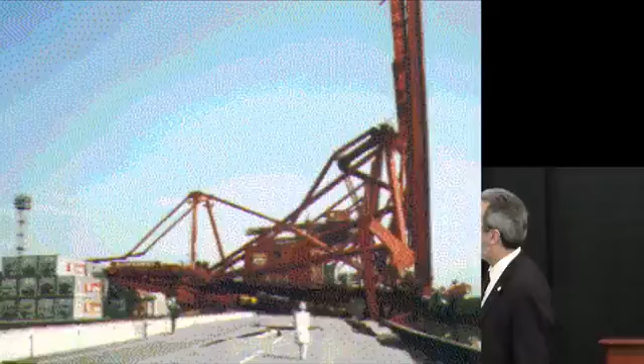Portions of the transportation infrastructure were devastated. The Akashi Kaikyo Bridge, still the longest bridge in the world, was under construction at the time, and the two tall pylons you see there moved relative to one another by about a meter. The bridge had to be redesigned in order to finish the construction. And perhaps most importantly, the port facility was destroyed, all in the span of about 30 seconds.

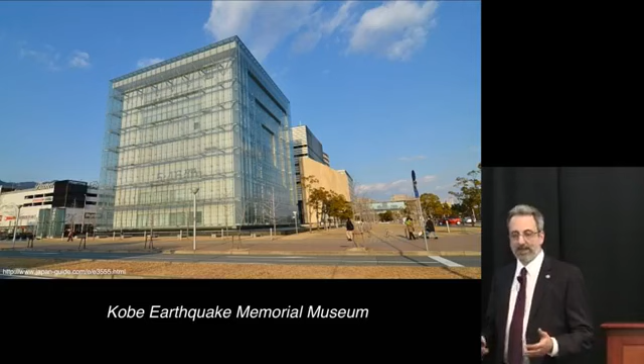If you go to Kobe now, and I encourage you to do so, you can go to the Kobe Earthquake Memorial Museum, a really unique place, and they have docents, volunteers, and in their broken English and my broken Japanese, we had a lengthy discussion about what it was like to be in the city in the days and the months, and in fact the years following the earthquake, as they tried to figure out how to rebuild, how to recover. And the city is still trying to recover.

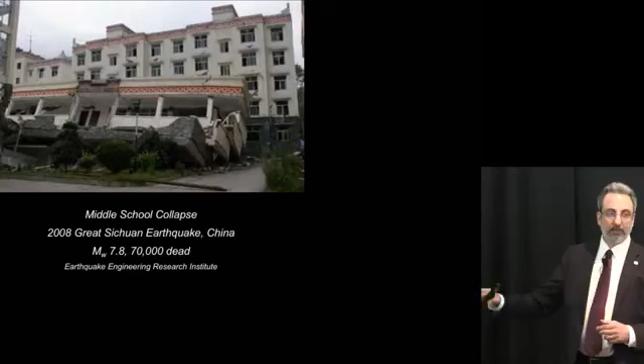And we see this repeated over and over again around the world. 2008, Great Sichuan earthquake in China, 70,000 people dead. 2005, Great Kashmir earthquake in Pakistan, leveled entire villages. 1976 in China, 255,000 people dead from one event.

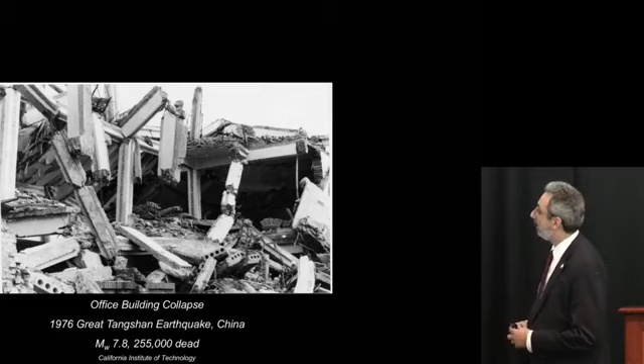And in Japan, the most seismically prepared country in the world, in my opinion, a large earthquake, magnitude 9.0 in 2011, and the subsequent tsunami that I'm sure many of you remember took out the Fukushima nuclear power plant, and that whole region still hasn't really recovered from this event.

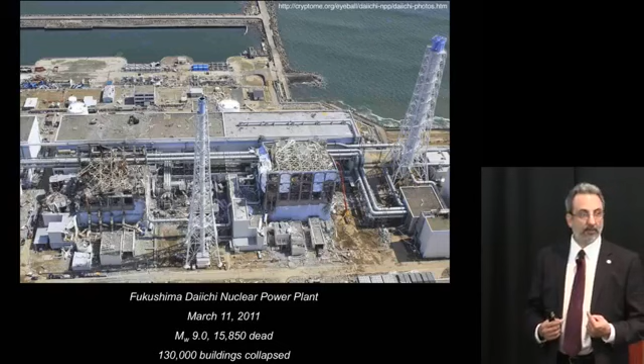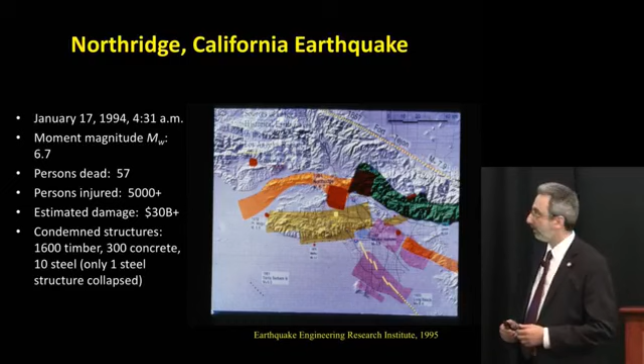But these aren't just events happening around the world, they're happening in this country too. Some of you might not remember the 1994 Northridge, California earthquake, but it really played a very significant role in how we think about structural engineering in this country. It was a magnitude 6.7 earthquake on the high side of a moderate earthquake, certainly not the big one. Thankfully, not too many people died, not too many structures collapsed, but it was the costliest natural disaster in the country's history.

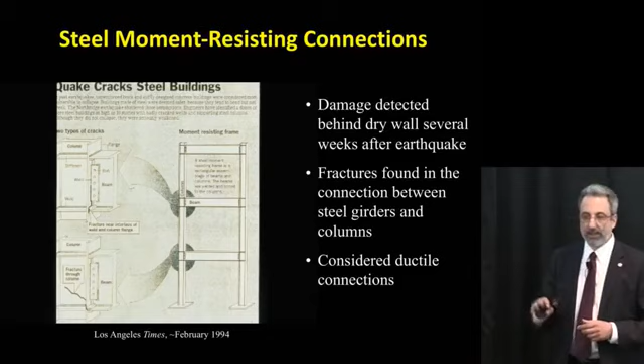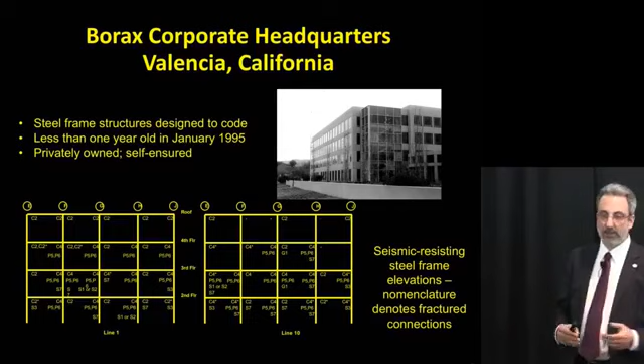The Borax corporate headquarters was less than a year old at the time of the earthquake. It was brand new, designed to code by a perfectly fine engineer. This was a moderate earthquake, and the owner, needless to say, was confused. This is a private company and it was self-insured, so this was a huge loss.

The building officials, after the Northridge earthquake, essentially shut down steel construction for a couple of years while researchers around the country and practitioners tried to figure out what happened. And that will bring certain portions of an economy to a standstill.

In the structural engineering world, we use a term called disproportionate collapse. We started using it in 1968 after a gas main exploded in the basement of this apartment building in the United Kingdom that caused the partial collapse you see here. Disproportionate means that the amount of damage that occurred seems disproportionate to the magnitude of the load, much more than we would normally want or expect given the loading.

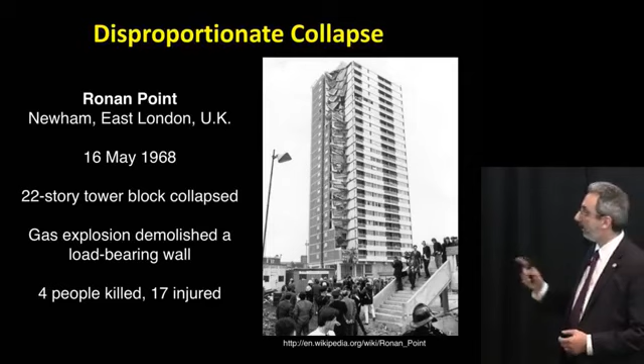But the concept of disproportionate collapse isn't just for an isolated building. It can also be thought about in the context of a region, and perhaps there's no better example of that than Hurricane Katrina in 2005, which became the costliest natural disaster in the country's history after Northridge. Because of the levee break, neighborhoods were essentially destroyed, and those neighborhoods really still, in many ways, haven't come back.

Kobe, Japan was the 6th largest port in the world at the time of the earthquake. In a relatively short period of time, economically, it went off the face of the earth. It still hasn't recovered. The shipping traffic had to go elsewhere and form new relationships elsewhere. It didn't take long for them to do that, and the city has been struggling to come back, at a time when shipping traffic is rising and has been rising exponentially around the world.

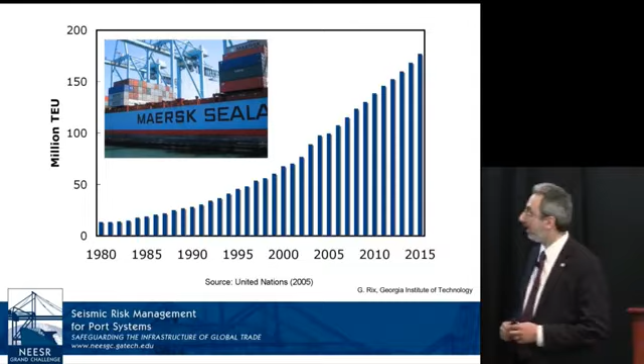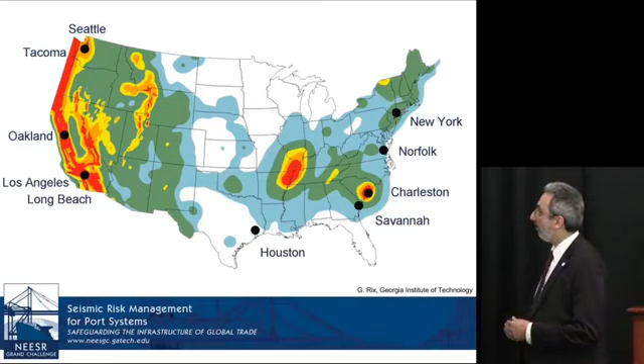So what are the vulnerabilities in the U.S.? Well, we're certainly familiar with the high seismic zones shown in red here on this map from the USGS. California, we understand, has very high seismic zones in many parts of the state. We're learning more and more about the Pacific Northwest, and more about mid-America around Memphis, Tennessee, St. Louis, Missouri, where very large earthquakes have happened in the past. Charleston, South Carolina, and even moderate earthquakes in this region are vulnerabilities. We have been improving, but we still have a ways to go.

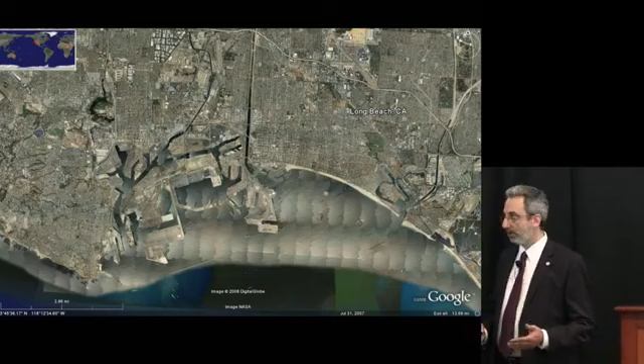This is the port of Long Beach, California, certainly in a high seismic zone. If we get an earthquake there, it could easily be larger than what we had in Kobe. What is that going to mean for the economy of the United States and of that region, where a huge amount of shipping traffic, goods from Asia, go in and out every day?

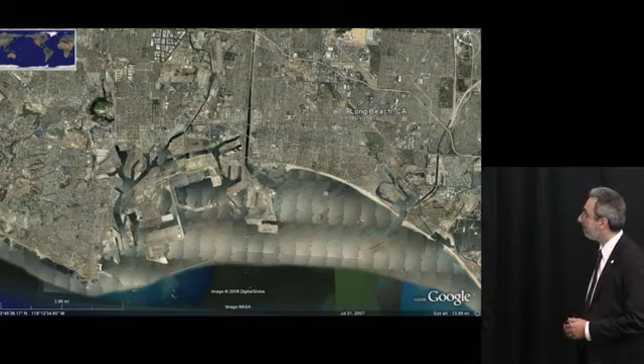So what does it mean to be resilient, to bounce back quickly from extreme events? How do we start to bake resilience into the design of our structures in our urban regions?

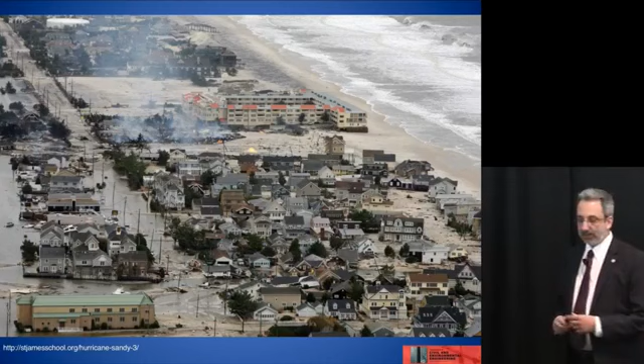Superstorm Sandy was certainly a relevant event for this part of the country, and the hurricanes that can affect the East Coast are clear to us all. I'm actually impressed by how much of the region around New York City has recovered from Hurricane Sandy, Superstorm Sandy. But how many times do we need to see images like this in New York City or in Boston before we recognize that we've got issues that need to be addressed?

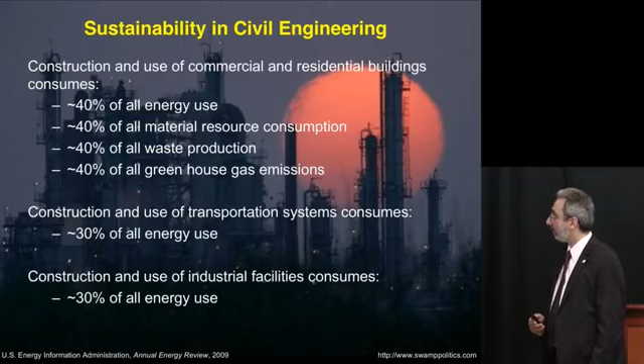But the way we absorb energy from the earthquake or the hurricane is through damage in the vertical columns, the horizontal girders, the diagonal braces. The steel material will yield, stretch, have permanent damage. Concrete will crack, have permanent damage. We ideally design it not to collapse, but we don't design it not to be damaged.

So you can have a relatively new building, and if you have a significant event, it might be so damaged that it takes weeks, months, maybe even years to repair. Or perhaps even it has to be condemned. This is our current state of the art. I think we could do better. And what I'd like to do today is show you a few ideas that we've been working on for the last few years to see how we can do this.

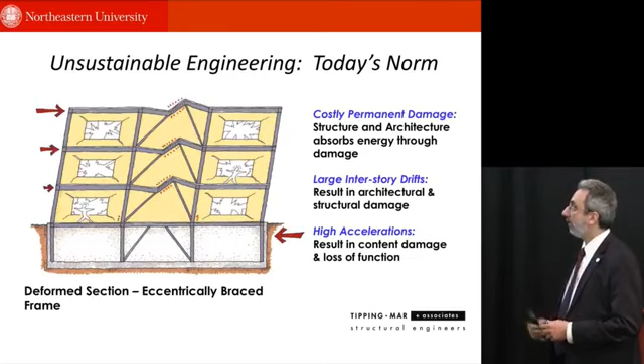The first is a project that I worked on with Greg Deierlein, the late Helmut Krawinkler, and Sarah Billington at Stanford University. Some of you have seen this idea. I've been talking about it for a few years now. But as you'll see, it's still quite relevant as we move forward. We call this a controlled rocking system, and the system for building structures has three features.

First, we take standard steel brace frames like we see here, the frames that would normally be damaged in an event to absorb the energy from that event, and we allow those frames to rock free of the foundation. And then we use that motion to engage what we call replaceable energy dissipating fuses, like the old fuses in the electrical system in your basement.

The fuses are shown in gold there, and they're just standard steel plates with diamond-shaped cutouts in them. We call them butterfly fuses. And the diamond-shaped cutouts allow those steel plates to shear about 40% of their original dimension without failing. They will yield the metal, but they're not going to fail.

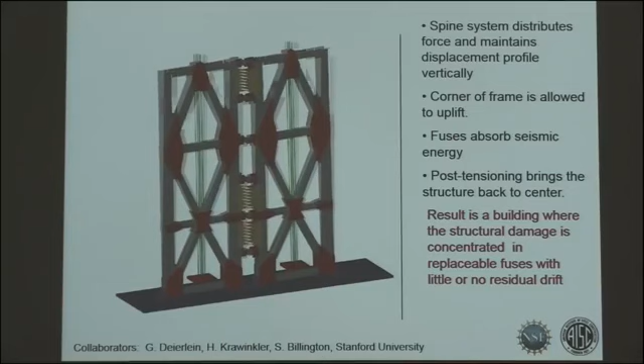Then the third component are the green lines. That represents vertical post-tensioning that we use to snap the building back to vertical. Then you could pop out the old fuse, put in the new one, and you're ready to go again. That's one idea for resilient engineering, how to bounce back quickly after extreme events.

We did a lot of different kinds of experiments on this structural system, culminating with Greg and I going over to E-Defense facility, the largest shake table in the known universe, which is outside Kobe, Japan. This shake table facility was built by the Japanese in response to the Kobe earthquake. It's one of the things they did to try to build a state-of-the-art facility. You can construct full-scale 7-story buildings on the shake table and then shake it with a 3-dimensional earthquake for very large earthquakes. We did a 3-story building here at 2/3 scale.

You could see the specimen in gold here. It's a single frame in this case, where the fuse is down at the bottom center. And then the gray structures around it, those are inertial masses on each of 3 levels. And they're on linear sliders. So as we shake this shake table to represent an earthquake, those inertial masses will shake back and forth, and they're attached to the specimen, and all that inertial force is thrown into the specimen, which is the only thing that's resisting the earthquake.

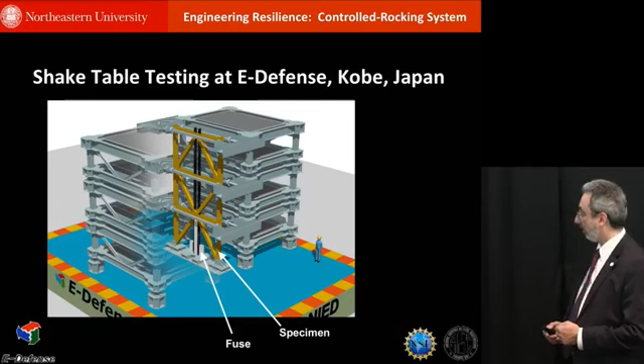So 2/3 scale, this is about 30 feet tall. Each of the floors about 10 feet tall. On the right shows a zoom in on the specimen, and as that gold frame rocks back and forth in a trough, that white post will go up and down and engage the fuse, which is at the bottom center, surrounded by post-tensioning to snap this back to vertical. You can see a zoom in on the fuse on the left with those diamond-shaped cutouts.

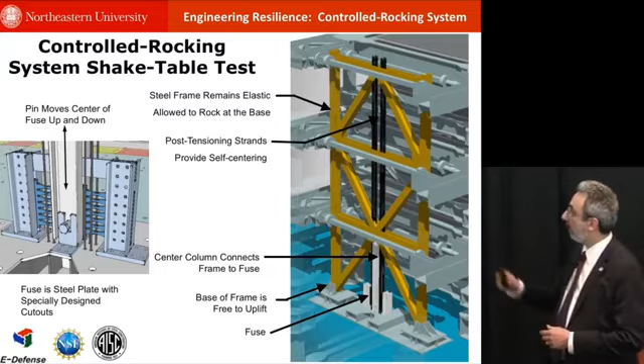This shows a photograph of the specimen being dropped into place. We did a number of specimens and experiments over there. The Japanese were extremely helpful and put in a lot of funding on their own because they were so interested in these concepts. You can see on the right, we're ready to go here on that large shake table, and there's a person there to give you a sense for the scale.

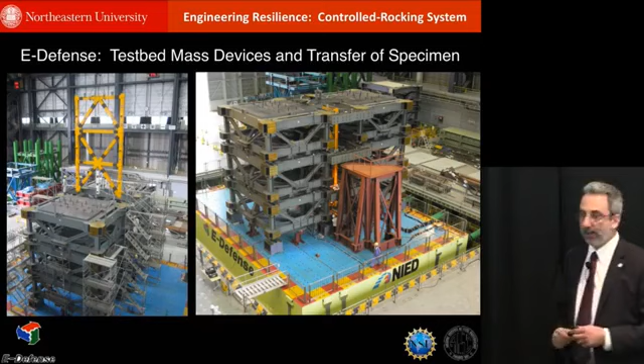Now, it's going to take some years to get this into the National Building Code because it's really a fairly different way of designing structures. Our building codes are not set up to do something with a stiff frame, and by the way, the whole point here is that those steel frames remain damage-free with a fuse.

But we're working on getting this into the building codes, and in the meantime there have been some early adopters, such as David Mar out on the West Coast, putting these systems into high seismic zones, convincing the building officials and the owners that this is the way to go. He did so in the Orinda City, California offices with a 2-story steel brace frame there for the seismic system.

You can see the post-tensioning looping underneath, so you get enough length on the post-tensioning to be able to stretch and snap this back to vertical. And he used a little different configuration.

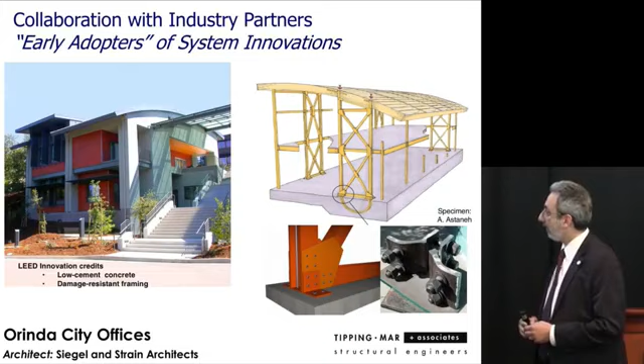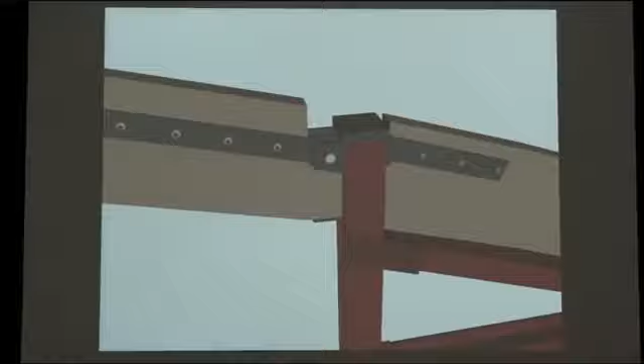Here he used deformable angles down at the base that deform when the structure rocks. You can see the post-tensioning then running up the inside of the column, and then you can use things like slotted connections or a pin connection like you see at the top in order to ensure that the rocking motion does not inappropriately disrupt the rest of the frame. Then if you need to, you can replace the angles after the major event.

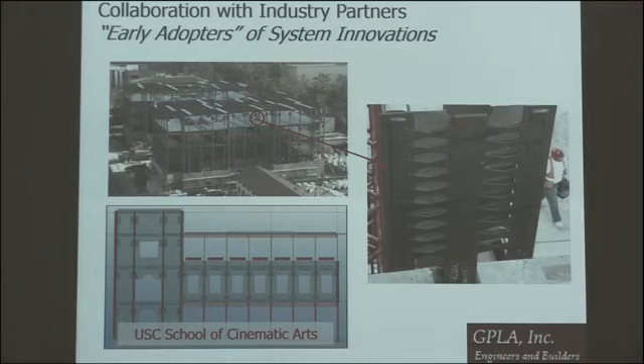In Southern California, Greg Luth used this system in the University of Southern California School of Cinematic Arts. Instead of steel brace frames here, he used precast concrete wall panels that are going to rock, and he connected them with the steel butterfly fuses like you see here.

David Mar used this in the David and Lucille Packard Foundation headquarters in Los Altos, California, configuration very similar to what we tested at E-Defense.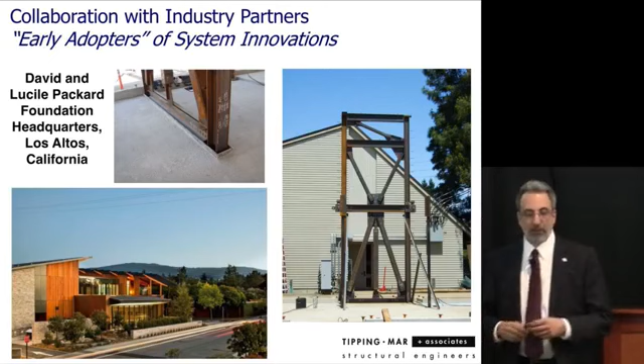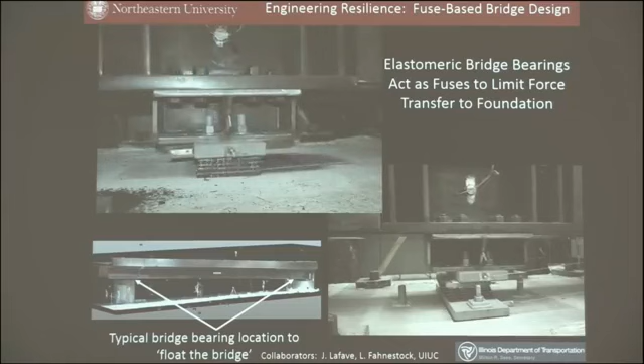And in the years intervening, I've been trying to take this idea to other types of structural systems, tower systems, bridge systems. This shows some experiments I did with Jim LaFave and Larry Fahnestock at University of Illinois, looking at standard elastomeric bearings that sit on the underside of girders and on top of the foundations in a typical bridge structure.

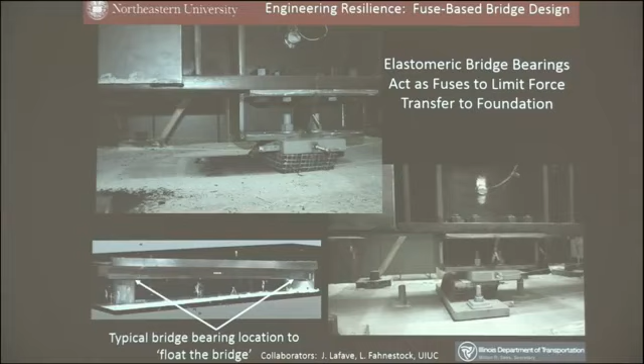These are there for just minimal temperature distortions that occur in a bridge to be able to absorb those. But what we showed here is you could do large displacements like you would see at an earthquake and essentially use these bearings as a fuse, because they isolate the superstructure and leave that superstructure relatively damage-free, and leave the foundation structure damage-free. So we'd like to try to take these ideas to other places.

There's a new project that a few of us recently got from the National Science Foundation and from a number of steel organizations, a large grant from the steel industry. This is work with Ben Schafer at Johns Hopkins, Matt Eatherton and Sam Easterling at Virginia Tech. And the project here is to look at the three-dimensional behavior of buildings, shaking in earthquakes, as shown in the animation on the right.

In particular, we look at the floor system, which is responsible for taking all the inertial force in the building and throwing it out to the seismic system, the vertical steel frames, for example, that bring the forces down to the ground. We know surprisingly little about the behavior of those floor systems, given that we're designing them every day. We have surprisingly few design provisions to guide us in the design.

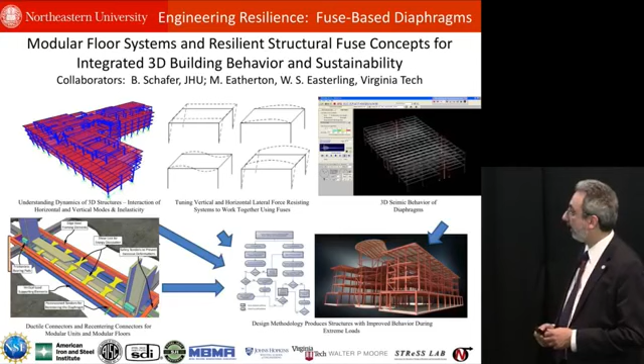So we got this project to understand that better, especially for three-dimensional buildings like you see on the left. As part of this, I'd like to look at the concept of putting in replaceable energy-dissipating fuses between the floor diaphragms and the steel vertical systems. That will essentially cushion the seismic system and perhaps transform the way in which we design buildings in high seismic zones.

This will be work we're doing in the coming years out at the stress lab. This shows a schematic view of some of the test specimens that we're going to be testing at full scale to look at a floor diaphragm subjected to cyclic seismic loads. You can see in yellow some of the fuses that we'll try to incorporate here.

Now, when we're developing new structural systems like this, we also want to think about how to prevent collapse. Of course, in our field we do a lot of experimental and computational simulation, but historically, engineers have not actually been simulating structures collapsing all the way to the ground because it's difficult. So in the last few years, I've been developing some methods with my students to do just that, including new approaches for simulating fracture in steel so you can actually have complete dismemberment of steel components and therefore propagate collapse to the ground.

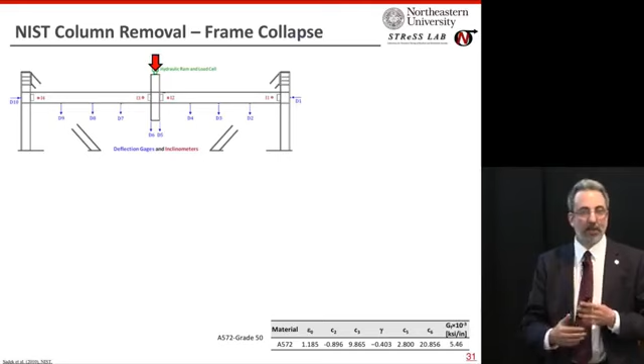This is a test from the National Institute of Standards and Technology where they had two girders framing into a column, and then they're mimicking what would happen if that column below was blown out, for example in an explosion, and then the weight from the building above pressing down on that column. They wanted to see how the structure would behave and if the connections would hold up.

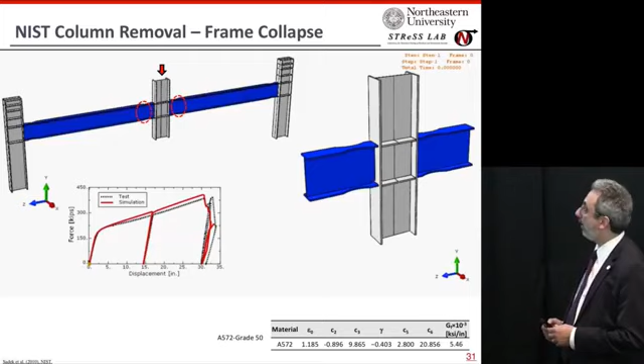So we compared to the test. You could see in the plot there of the vertical load versus vertical displacement, a very nice comparison. Here's an animation that shows the stress buildup in the connection regions and, in fact, the fractures starting to form here.

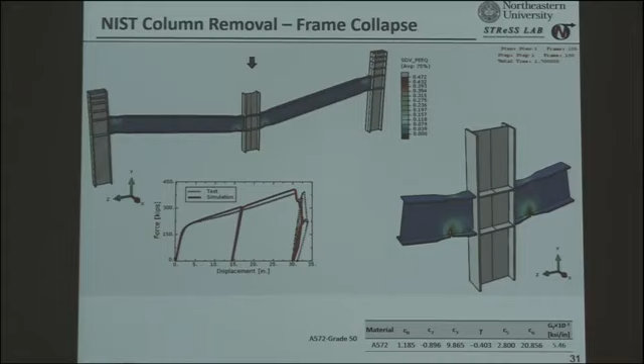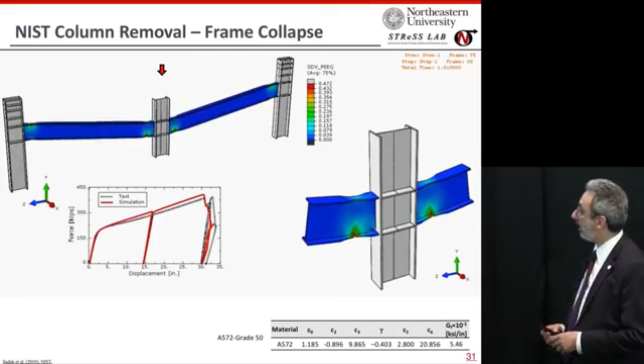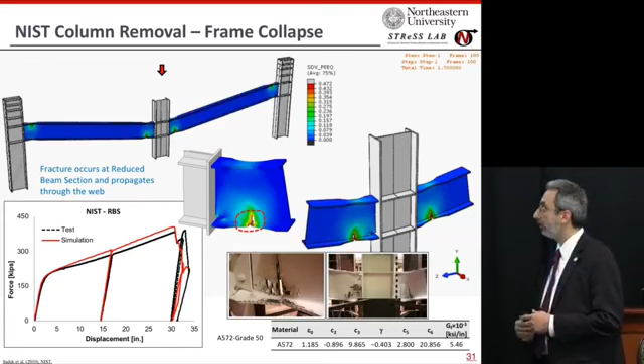We've developed new approaches to be able to create and simulate the initiation and propagation of those cracks. It's quite difficult to do, and we have validated now against a wide range of other experiments. You can see here we're matching up with the photographs of the experimental tests quite well. So we think this is quite robust and is going to start to let us model collapse of structures completely to the ground, and therefore, of course, try to develop methods to prevent that from happening, and indeed help make that urban region more resilient.

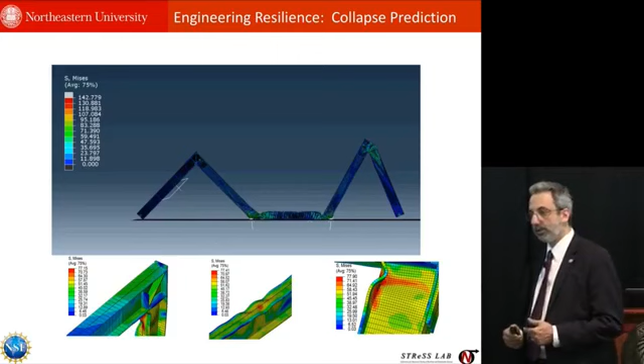Simultaneously, we're thinking about sustainability, how to cut down on energy use in construction, for example. One system we've been working on for a number of years relates to steel structures. The end-of-life scenarios of typical construction materials are shown here.

On the left, we can see what happens to concrete after buildings, for example, are taken apart. About 20% of the concrete is recycled, 75% of it is downcycled, meaning it's essentially pulverized and then used in applications that don't require as much stress, such as sidewalks. Timber, which many of us think of as a very sustainable material, about 60% of it goes to the landfill after its use. I hope the younger generation can develop systems that improve on that. Steel, on the right, we see about 93% of all construction steel is recycled, and indeed about 100% of all the steel you see in building structures comes from recycled steel.

So that's good. But recycling also requires energy to melt the steel back down. About 6% of all steel is reused, and I'd like to see that percentage go up dramatically.

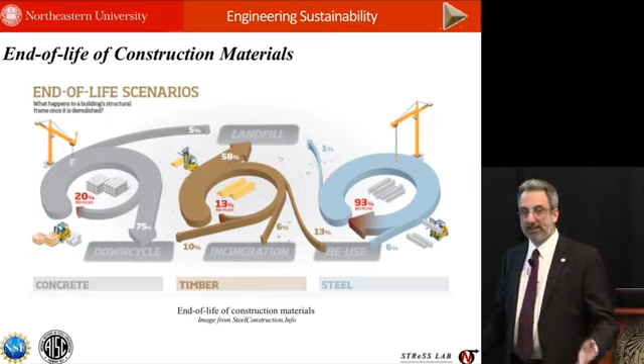So for the last several years, we've been working on a project we call Design for Deconstruction. This is done in collaboration with Mark Webster at Simpson, Gumpertz, and Heger, a practitioner. Steel building structures right now are constructed by having steel framing for your floor system and then a monolithic concrete slab poured on top, connected to those steel girders with what we call shear connectors that are embedded in the concrete and welded to the steel. It's not deconstructible at all. So at the end of a building's useful life, the building has to be demolished, and the floor system has to be demolished.

We envisioned something different, and here we're using precast concrete planks in a staggered pattern like you see in the floor plan on the right. Those planks are going to be attached to the steel beams underneath with clamps.

These clamps are relatively new on the market. They're very strong, and so we use the clamps to attach to embedded channels on the underside of those planks. This is a system that Mark conceived of early on about a decade ago, and we were pleased to get some NSF funding to be able to look at this.

And we view this to be used in the context of all bolted steel construction. So at the end of a useful life of a building, you can dismantle it, deconstruct it, and reuse the planks. You could stock them in a supply center, just as we do now with new steel beams, and then deconstruct the steel beams and columns and reuse them. Most buildings are taken down because the owner doesn't want them anymore, not because they've been subjected to some extreme event. Of course, if the structure is subjected to extreme loads, you probably can't reuse the components, but the vast majority are not. We'd like to create a whole new industry around this.

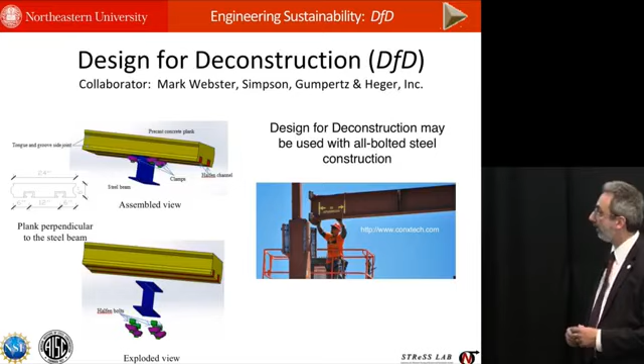So we did some tests out at the STReSS Lab to validate the structural integrity of these systems. On the left are what we call push-out tests, which look at the strength of the clamps under cyclic seismic loading. But I want to show you results from the system on the right. This is a full-scale composite beam with a steel girder and 15 of these precast planks on top, connected with the clamps. We use those vertical actuators, the two shown in black, to push down with extreme loads, simulating the loads you'd have on a floor, just like in this room. We want to make sure the structure has integrity.

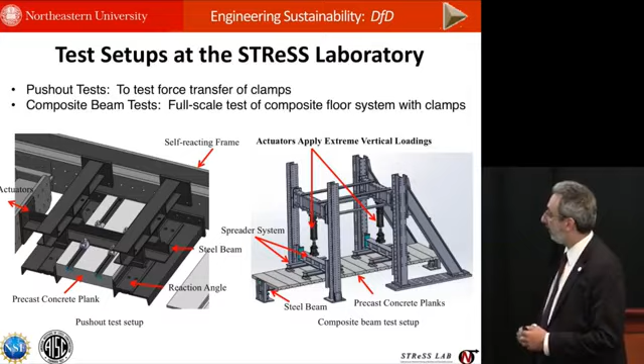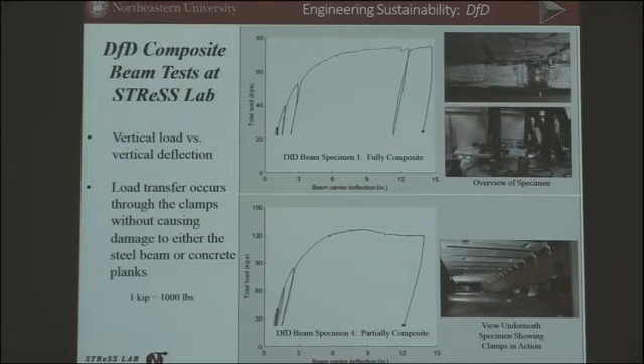So this video shows the vertical load versus vertical displacement on a couple of our tests. The middle video on the right is time-lapse—the tests take hours—and shows an overview of the specimen, so you can see it deflecting down as we press with the actuators. The other two views show the steel beam and the underside of the concrete slabs. You can see on the bottom right the clamps as we move down the length of the beam. What these results show is that we could transfer the force necessary between the concrete and the steel very effectively, and in fact, what's quite new is it's essentially damage-free. A damage-free approach to force transfer is what enables these components to be reused.

Now, simultaneously with developing new types of structural systems to try to be resilient and sustainable, we've also been working on new methods for monitoring structures and being able to quickly and effectively understand what the damage is on a structure, both for routine inspection and especially after a significant event like an earthquake or a hurricane. I've been working with colleagues at the Robotics Institute at Carnegie Mellon University for the last several years on this, using unmanned aerial vehicles to completely and autonomously circumnavigate a structure.

The UAVs, as we call them, are mounted with laser scanners and cameras that take a complete 3D point cloud and a lot of camera images of the structure, which I then use to reconstruct the three-dimensional geometry, develop analysis meshes which we use to simulate the response of the structure, and most importantly, we use those laser scans and images to automatically detect damage.

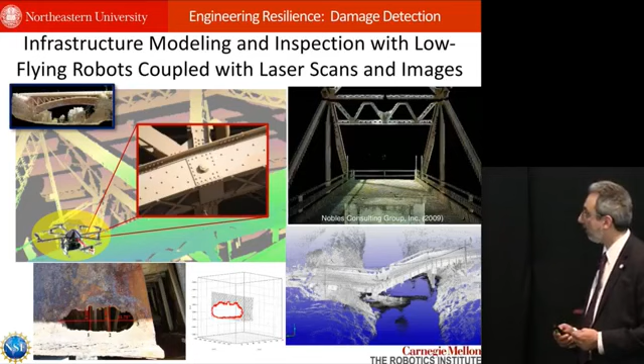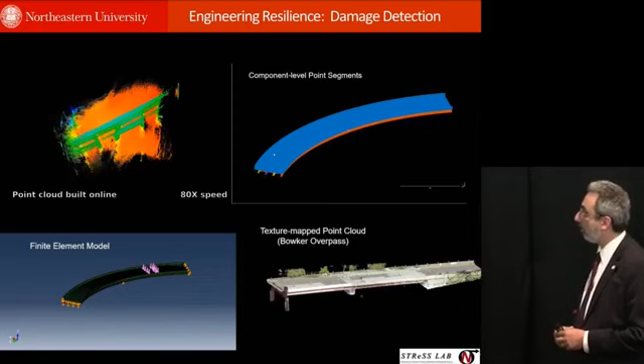So this shows a series of videos that give you an idea of what we're doing. On the left, the unmanned aerial vehicle is autonomously flying around the structure. So these are not drones—they're not piloted, they're completely autonomous. Through the laser scanner and the images, it builds up the colored point cloud you see here. The colors come from the camera images mapped onto this 3D point cloud.

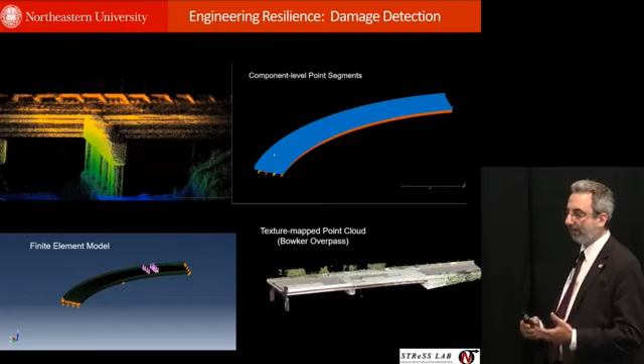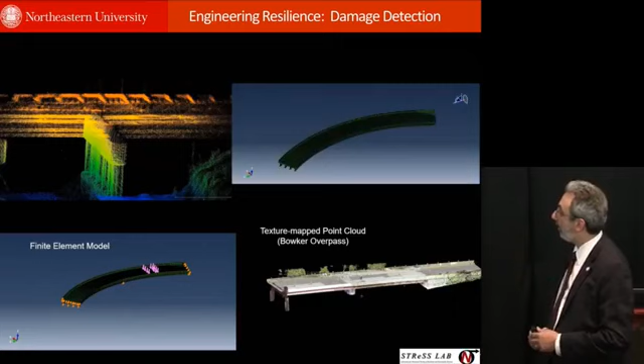Then on the upper right, we use that point cloud to automatically identify every object in the structure, and we've developed the algorithms to do this. They're heuristic-based, meaning we are essentially mimicking a structural engineer's understanding of how a structure is put together. We have developed algorithms for occlusion, so understanding that members are hidden behind members, bolts going through members, and from there we create the complete three-dimensional geometry, understanding every object, and then we mesh it.

You could see the small squares there. This breaks that geometry up into small cubes, which we can then use for what we call finite element analysis, to simulate the stress, the strain, the displacements, as we see on the lower left when we start to subject this structure to extreme loads.

You can see the deflections going on now, typical loadings on a bridge like this, so we start to understand where the damage may be coming from. Then on the lower right, we go back to the point cloud and use that to automatically detect damage: steel section loss from corrosion, bent members, out-of-plumb members, concrete cracking, concrete spalling, and other such types of damage.

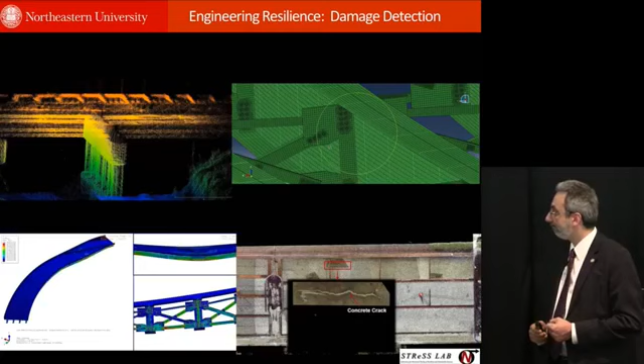Over the last several months here at Northeastern, Taskin Padir, Peter Boynton, Steve Flynn, and I obtained a grant from the Department of Homeland Security and the Global Resilience Institute right here at Northeastern to take these technologies and start looking at post-event automated damage detection, now looking at structures after a major earthquake, after a major hurricane. So we're going to be doing that moving forward. This is a little bit more difficult type of damage to detect, but our fabulous students will succeed.

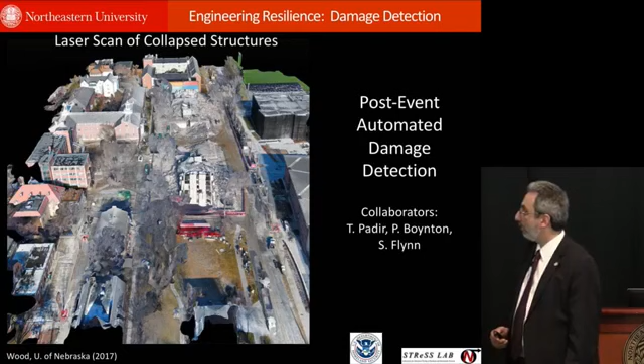Simultaneously with this work on the built environment, I'm very pleased to be participating in some major research to bring renewable energy to our country, and in particular to this region. We've been working on offshore wind for some years now with grants from the National Science Foundation, Massachusetts Clean Energy Center, and other places. This is work going on with Andy Myers here at Northeastern, Sanjay Arwade at UMass Amherst, and Eric Hines, who's at LeMessurier Associates, a practitioner also at Tufts University, and a real thought leader on this topic.

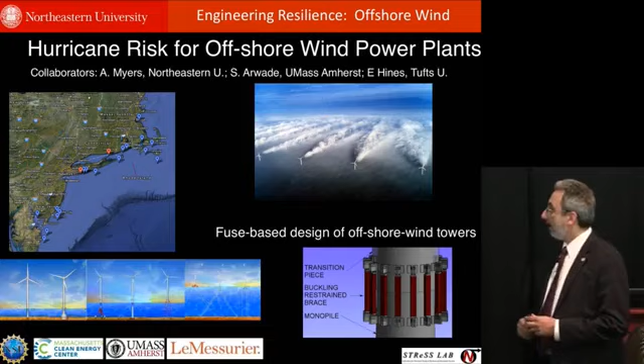As many of you might know, the country's first offshore wind farm just got installed a couple years ago off the coast of Block Island, down in Rhode Island. It's called Deepwater Wind, and it has 5 offshore wind turbines that you see here. This can provide 30 megawatts of energy. The Department of Energy has set a goal of having 86 gigawatts coming from offshore wind by 2050. 86 gigawatts is about 7% of the electricity need in the U.S. Personally, I would like to set much higher goals than 7%, but this is what we've got so far.

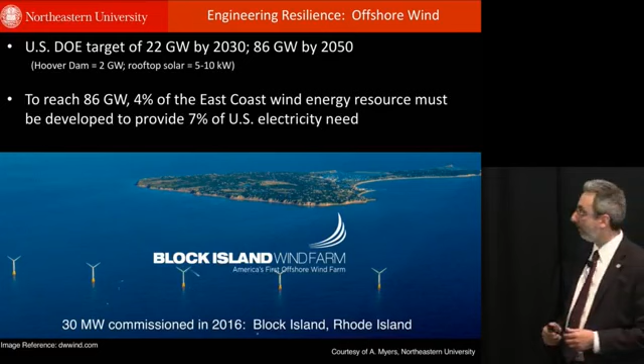Now, off the East Coast, 86 gigawatts would represent 4% of the wind capacity for offshore wind. If you do the math, what that means is there's enough wind capacity off the East Coast to power the entire country, and then some. Think about that for a second. And certainly we could power the East Coast.

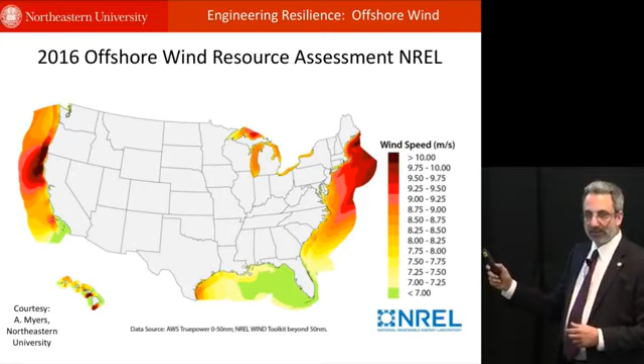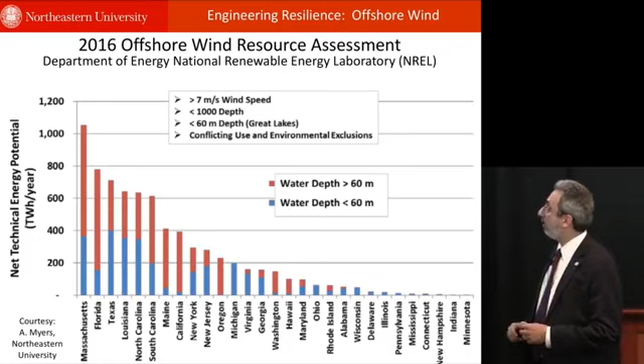Now, I'm sure a number of you have heard of Cape Wind, which got a lot of press for years. This was an offshore wind farm that they tried to develop, and it actually got pretty close, but it's not going to happen. But in the ashes of that project, an entire industry is going to be built.

Now, Massachusetts understands this. The state legislature understands it. The governors understand it. There's been some great leadership here, especially from the Massachusetts Clean Energy Center. And so there is some hope.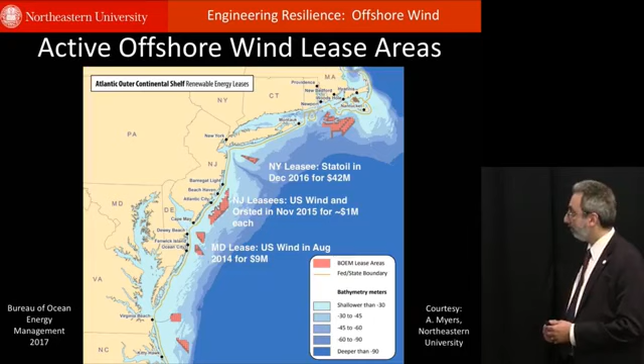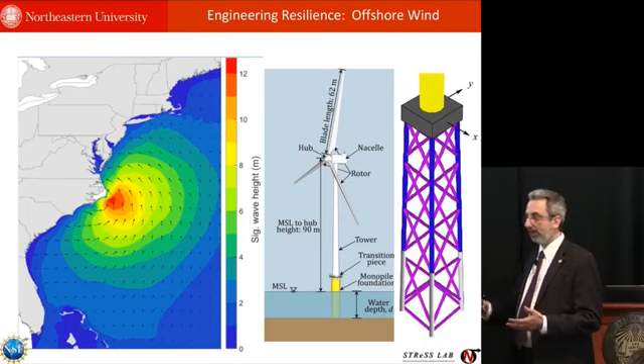Very pleased that we've gotten a good head start on this. Through the grants I mentioned before, we've been looking at the impact of hurricanes in this region, and in particular looking at the combination of wind loading and wave loading on offshore wind turbines to understand how to design them better. We've been looking at monopile towers and jacketed structures like the truss structure on the right, developing approaches for design that we think are going to be more robust, certainly in this region. We call this performance-based engineering, where we look at the desired performance at different levels of loading, for example different levels of hurricane, and then develop methods to predict that and ideally to prevent unwanted damage from happening.

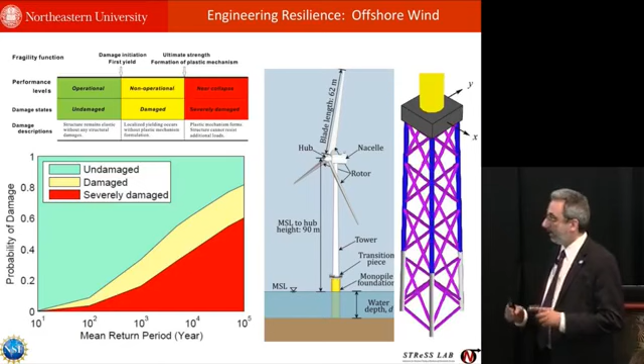In addition, the schools in this region for a number of years now have not been working in competition with each other. They've been working collaboratively. The Massachusetts Clean Energy Center gave us a grant a couple of years ago to form what we call the Massachusetts Research Partnership. It includes Northeastern, Tufts University, UMass Amherst, UMass Lowell, UMass Dartmouth, and Woods Hole. And then a few other Massachusetts institutions have started to participate as well.

Our mission with this grant is to write a report that's going to be coming out this summer that documents, ideally for an audience consisting of the federal government and the Department of Energy, what the needs are to build a national research infrastructure to create research in offshore wind so that we can create the industry and help create the industry for offshore wind.

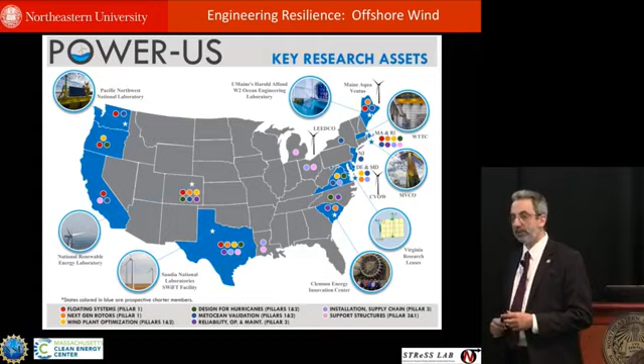As part of that, we've also started communicating with and collaborating with virtually every major player doing offshore wind in the country, and you can see that here. We formed an organization called Power US, Partnership for Offshore Wind Energy Research. Great to see these institutions, including some of the national labs, working collaboratively on this to try to make this happen.

In fact, next Monday, the Massachusetts Clean Energy Center is putting in a $20 million grant to the Department of Energy on behalf of most or all of these institutions to form the first major research consortium dedicated to research on offshore wind. So that's happening right here with Northeastern participating. Very glad to be a part of that, and we'll see what happens in the coming years.

Now let's finish off by taking this up to thinking about whole urban regions and how we think about resilience and sustainability in urban regions. The work we're going to be doing in the next couple years, which I've been working on for the last couple years on an NSF project, is with the 8 faculty that we have up there. These are all from Northeastern. Mario Sznaier is the principal investigator. They're from colleges throughout the university, so truly an interdisciplinary team, and it's been great working with them.

This is one of the NSF CRISP grants, Critical Infrastructure Resilience. Our goal is to try to make the emergency healthcare system in an urban region more resilient, and in particular we're looking at urban coastal regions that are subjected to hurricanes and storm surge.

We're going to be looking at the power network, at the communications network, at the building stock related to critical facilities like hospitals, police stations, fire stations, and so on. We're going to be looking at people before and after a major event, doing some agent-based modeling of the people and of the decision makers. And then putting all that together to do simulations where we develop control methods to try to control these networks and control these systems to make them more resilient, to be able to bounce back more quickly after extreme events.

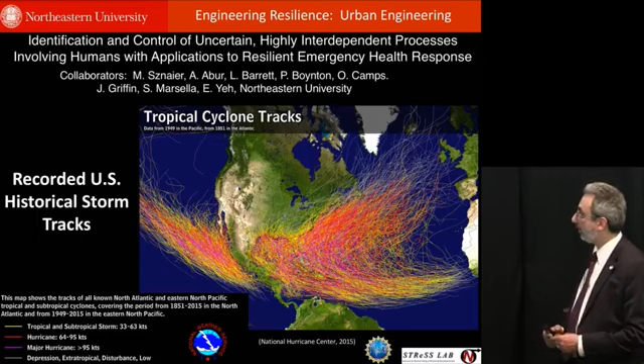We're going to be using Boston as a test bed. So in order to estimate the damage that occurs from these hurricanes, we first need to have all the assets in a region. So we're currently collecting information on every building, ideally, in the Boston region, every roadway, every bridge, every power infrastructure, communications tower, pipeline infrastructure, whatever we can get.

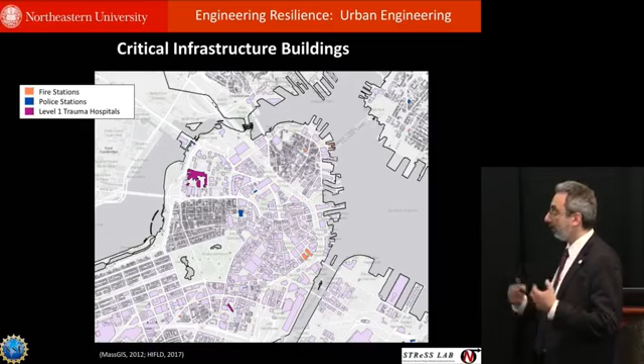So through this, we have to establish properties on these that we're going to use to drive our simulations. For example, building age, going all the way back to 1700, shows what kind of building code might have been used to design it, and then we can try to account for that in our simulations, et cetera.

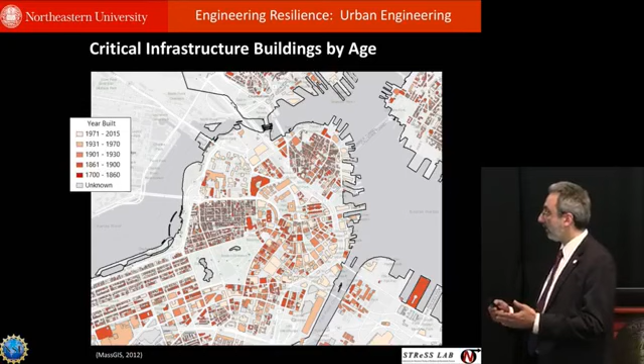What I'd really like to bring to this, though, is the concept of resilience and developing new methods that account for new types of systems that can bounce back more quickly, incorporate those in the simulations, and be able to show the advantages of using these.

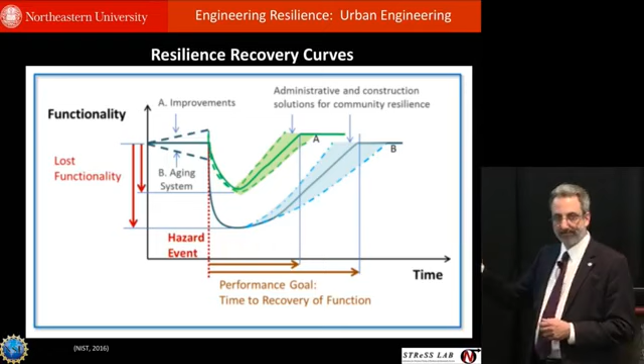And then we'll feed that information up to our network modelers in electrical and computer engineering and other parts of the project who are going to start to understand the behavior of damaged networks, of damaged healthcare systems, and how to make these systems more resilient as we move forward.

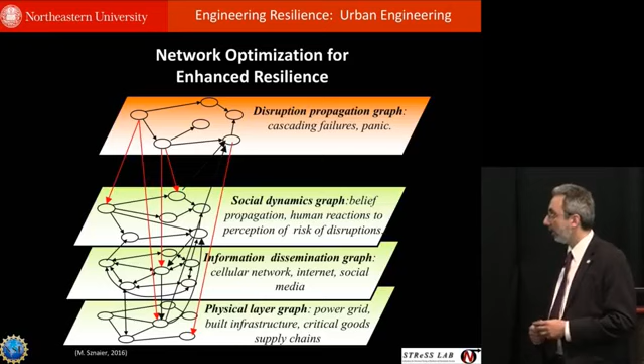The concept of resiliency is relatively new in the United States. Many of you are familiar with the concept of LEED, where buildings can be rated silver, gold, platinum, et cetera, for trying to account for sustainability—how much did it decrease energy use or material use, et cetera, in buildings? And I'm not quite sure if LEED is really doing what we're hoping, but it's a start, and it's certainly getting a lot of the public talking about it. It's getting the owners talking about it. Everybody tends to have a general understanding of what LEED means.

The U.S. Resiliency Council, which is relatively new, would like to do the same thing on the concept of resiliency, bouncing back quickly after extreme events. So they've established silver, gold, and platinum rating system. So now when you're choosing what buildings you want to live in or choosing what buildings you want to work in, maybe there'll be a resiliency rating so you can actually understand whether this is going to bounce back quickly.

Now, I would venture to say, sustainability, we all understand the potential importance for that, but resiliency is the real thing. If where you live gets hit by a major hurricane or a major earthquake, this is something you might want to understand. These are the kinds of simple things that can actually change a culture.

And I'm hoping this happens moving forward so that, unlike the Goldman Sachs headquarters in Superstorm Sandy, which was an island of resilience planning amid a sea of darkness, we could start to do better across entire urban regions.

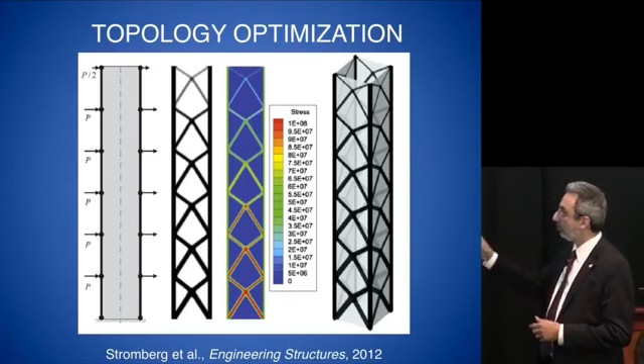Instead, you can develop more freewheeling forms like you see here. These are potentially more organic forms. Of course, you have to think then, what about constructability? Well, one of the greatest structural engineers in the world, Bill Baker, has been using these ideas for structures at Skidmore, Owings and Merrill, and you could see some of the natural organic forms for the mega bracing that he has here.

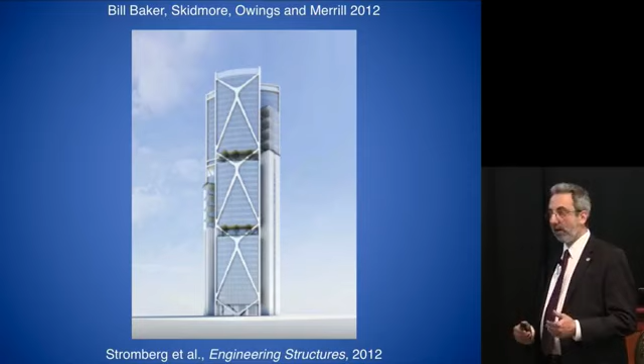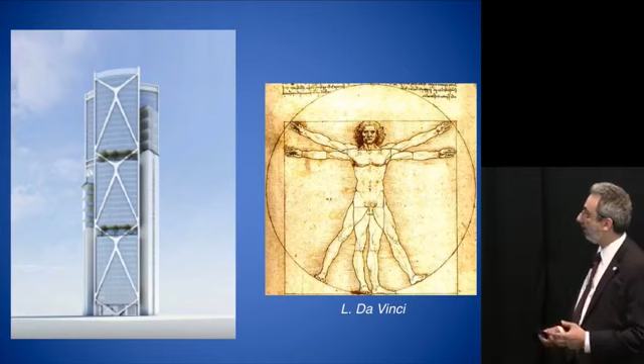These systems just feel right, and they feel efficient, and indeed, they often are efficient. In fact, ideas like this have been around for a long time, and I'd like to bring the concept of topology optimization in the years to come to start thinking about regions, urban engineering of regions.

Of course, there are many constraints in an urban region, but as we start to integrate objectives of resilience and sustainability, can we have a little more free flow of our ideas, free flow of understanding the geometry of a city, to really start to get new solutions that might upgrade our capabilities significantly. Something I hope to do in the years to come.

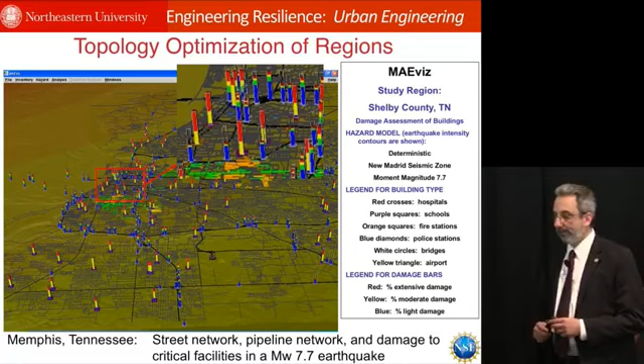I just want to finish by thanking again all of the collaborators on these projects. There have been many, all of the sponsors, especially all of the students who have worked so hard on this work. The collaboration in general from all of my colleagues at Northeastern has truly been wonderful. It's been a great ride. I am very appreciative. Thank you very much.